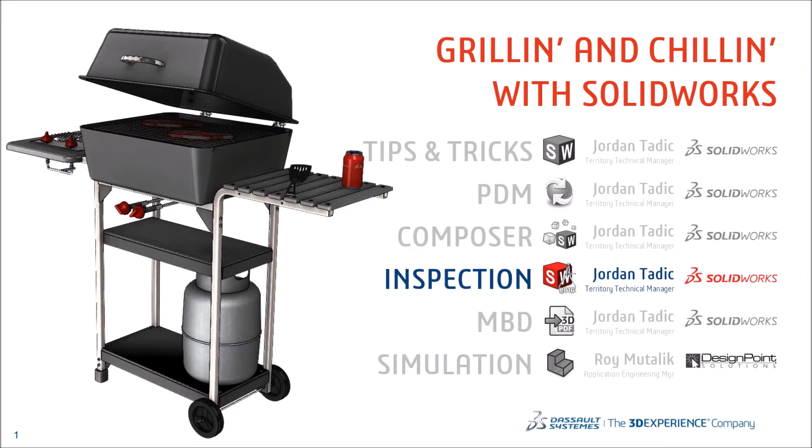So now the topic at hand is SOLIDWORKS Inspection. As I mentioned earlier, anyone with a quality department or the need to create first article inspection reports and such, this product is just the easiest to learn because the training is almost no time at all, and immediately within seconds you'll be able to start publishing out first article inspection reports with zero accuracy issues. So let's take a look at how it works.

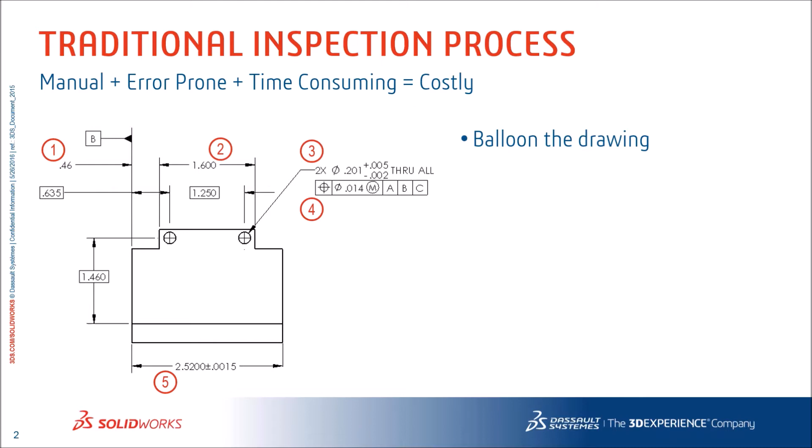First off, let's understand the traditional inspection process. So engineers or detailers are creating drawings, and those drawings might be available on the quality department screen digitally like a PDF, or in a lot of cases they are printing these out and creating balloons with a pen and maybe a little stencil for each one of the critical dimensions that need to be inspected.

Now, that takes some time, but the idea is they want to populate a first article inspection report. So they'll transpose those balloons maybe in a software like Microsoft Excel to capture all of the important information for inspecting these parts that are actually being produced out on the shop floor. So they'll go ahead and record the nominal values and then calculate the upper and lower limits and apply those to the specific columns in a spreadsheet.

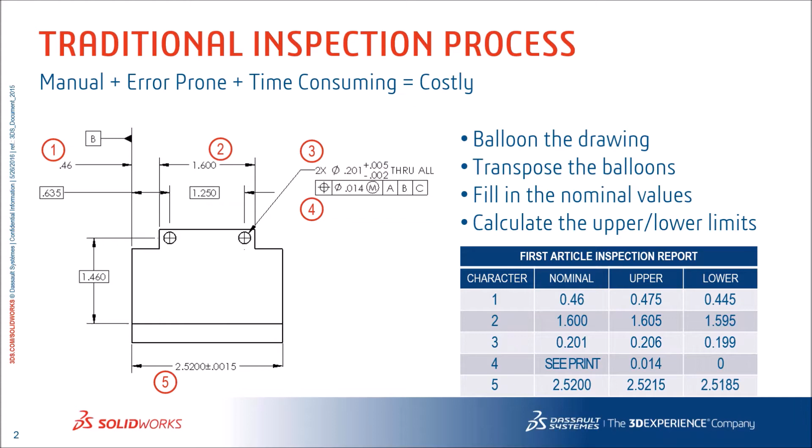So this process currently is very manual, and because it is, it's error prone and it's time consuming as well. And if you consider the fact that that was just one drawing view and this has to be repeated for every drawing view across maybe even a multi-sheet drawing, again, that could take quite a while.

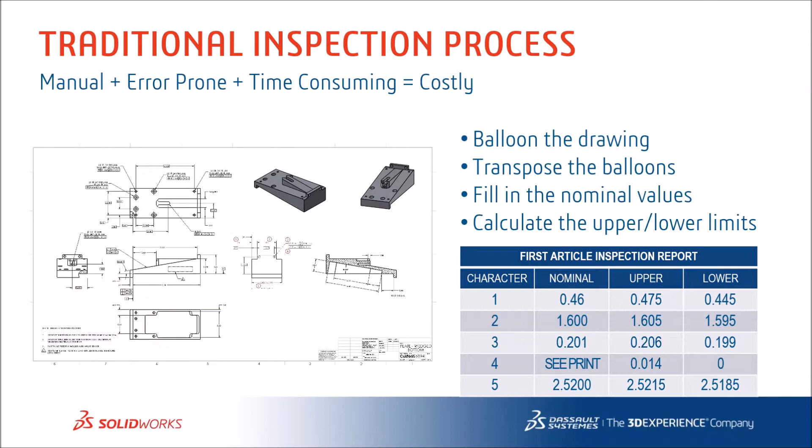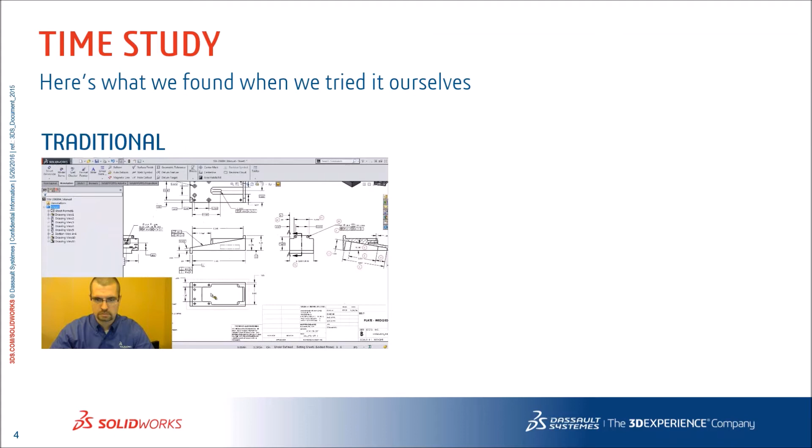To figure out how long it actually took, we put it to the test ourselves. This is Steve, my colleague, and he volunteered for the task of detailing and ballooning an entire SolidWorks drawing. Then he went ahead and captured each one of the critical parameters into a Microsoft Excel spreadsheet. All right, so typing these in, calculating out the upper and lower limits, and hopefully not making a mistake in the process. It took him about 55 minutes. And you talk to our customers, or you go and talk to your quality department, and you'll quickly find that this is an accurate time estimate of this process.

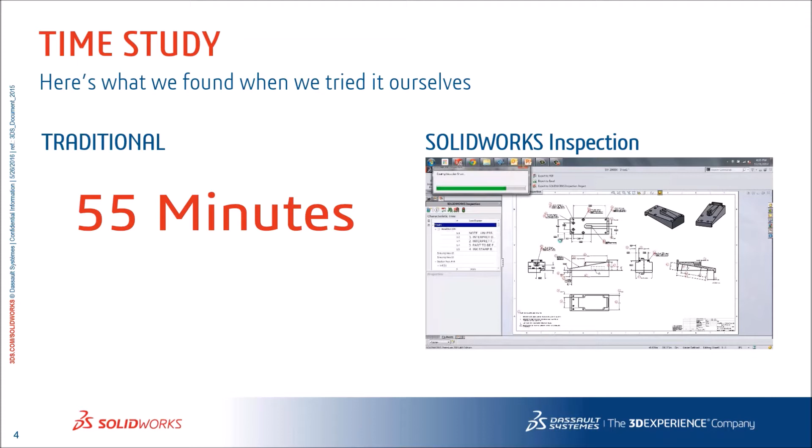Now, don't blink, because in SOLIDWORKS Inspection, this entire process, with 100% accuracy, can be accomplished in less than 30 seconds. So this video on the right is not being sped up at all. Just one click of the button, SolidWorks can go ahead and balloon an entire drawing, and then one more click of a button, SolidWorks can then transpose all that information properly formatted into an Excel spreadsheet. And again, that takes 30 seconds or less.

Not only are you speeding up that process, but you are also eliminating room for error because all the data is being translated digitally from one digital source to another digital source and not being typed in manually by a human.

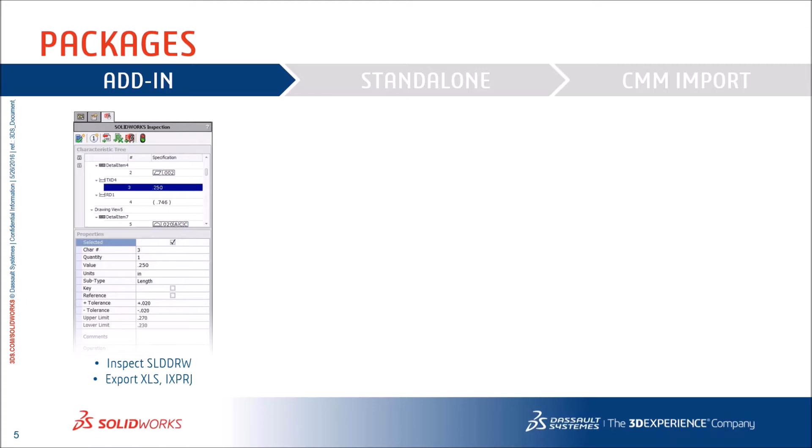So when we're taking a look at SOLIDWORKS Inspection, it's actually offered in a few different packages. Number one, and I'll be demonstrating each one of these individually, is the add-in. So SolidWorks is capable of doing all your CAD tool operations and so forth, but as you purchase products that integrate directly inside of a single window interface, you can activate and deactivate add-ins, and Inspection is one of those. And what you can do, like you saw in that 30-second video, is quickly create an inspection report from scratch from a SolidWorks drawing right inside of SolidWorks.

But not everyone has SolidWorks installed, especially those that this software is most useful for, which is people in the quality department. So what we also make available is a standalone version of the software. This is a very lightweight application that doesn't require the hardware specifications that a CAD software would require. And it's a lightweight application, so a very quick install that can be installed pretty much on any computer.

So here, a quality associate or employee can then open up a PDF or a TIFF file, balloon it themselves using OCR, optical character recognition, or they could open up a drawing inspection project originating from a SolidWorks drawing, and open that up directly into the standalone software so that they can then add the level of detail that they need. You know, additional properties, inspection processes, and so forth, so that the engineer and the SolidWorks license doesn't have to be consumed for that type of work.

And then the third portion of the software is importing measurements, whether it be from a CMM machine, you know, importing an entire text file or CSV file of all the coordinate measurements directly into Inspection, or just using a set of digital calipers that are connected to your computer via USB cable, and taking those measurements and having them register into the document.

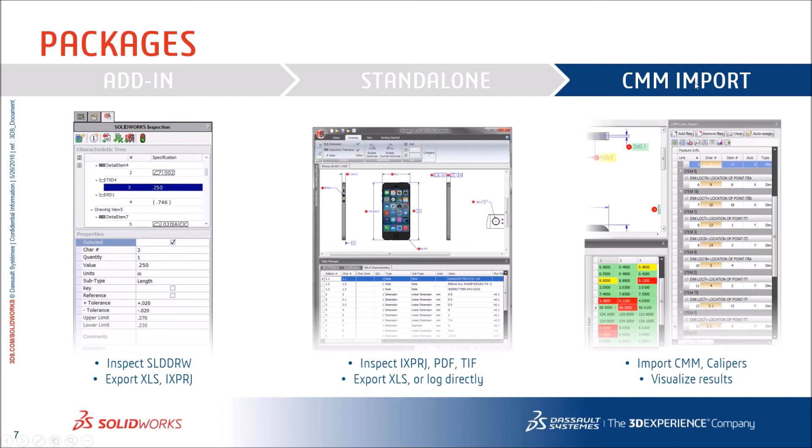Now, these three functionalities are wrapped up in two separate packages. There's a standard package, very inexpensive. Actually, the professional package is inexpensive as well, but I'd say anyone with a quality department or creating inspection reports that's a SolidWorks user, this is low-hanging fruit, a very inexpensive investment, an immediate return on investment with all the time that you're saving for little cost. So the standard is something that everyone should be looking at.

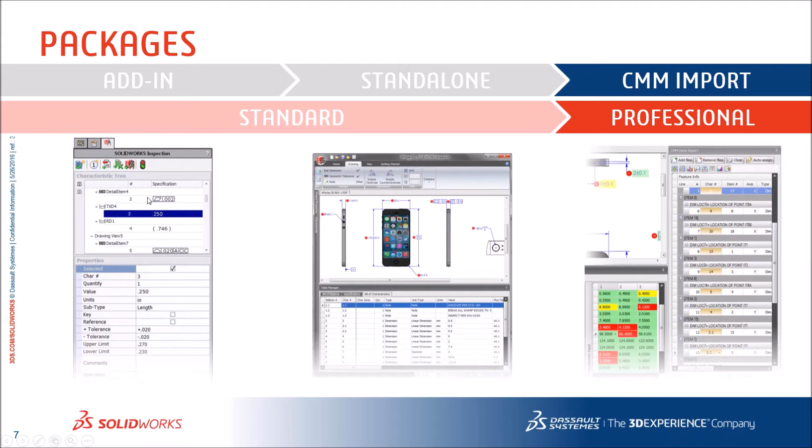But if you have digital measurement machines like a CMM or a USB set of calipers, then you should also consider the professional package, which will allow you to take those measurements and import them directly into the inspection standalone software. Now again, with the standard package, you get both the add-in, a single window user interface in SolidWorks, and the standalone package that the quality department can use. They just can't be used concurrently if you purchase one license. So if you need to use them at the same time, you can purchase multiple licenses.

All right, so let's take a look at what the add-in interface looks like. I'm going to open up one of the components, in this case this valve mixer component, and then open up the drawing from that component, and on my SOLIDWORKS Inspection tab, fire up a new project. This project on the left-hand side of the screen controls all kinds of default things. You could set this up once and forget it, or you could create multiple templates to choose default settings from.

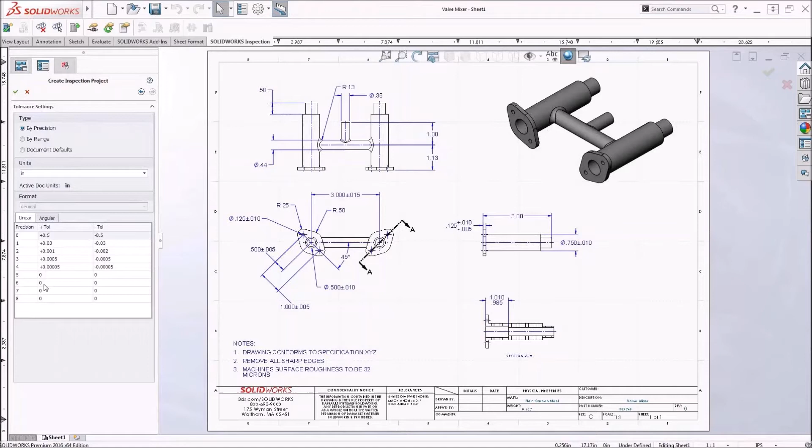And you could see that we could filter down the dimensions that actually get ballooned to maybe dimensions only marked for inspection, so it doesn't balloon all of them at all times. But in this case, I'm just choosing to balloon every single dimension in the drawing. Now immediately, on the left-hand side of the screen, you see an entire list of characteristics. These are the characteristics of the data inside of the drawing that need to be accounted for in the inspection.

So we can move the automated locations of each of the balloons around, tidy it up a little bit. But as I click on any dimension, I can adjust its inspection properties. In this case, these two dimensions don't need to be inspected. I'll just delete them from the inspection report, and it will re-balloon the entire drawing so that everything is sequential, without skipping any numbers. I could also add details like what inspection method is going to be used for each individual characteristic.

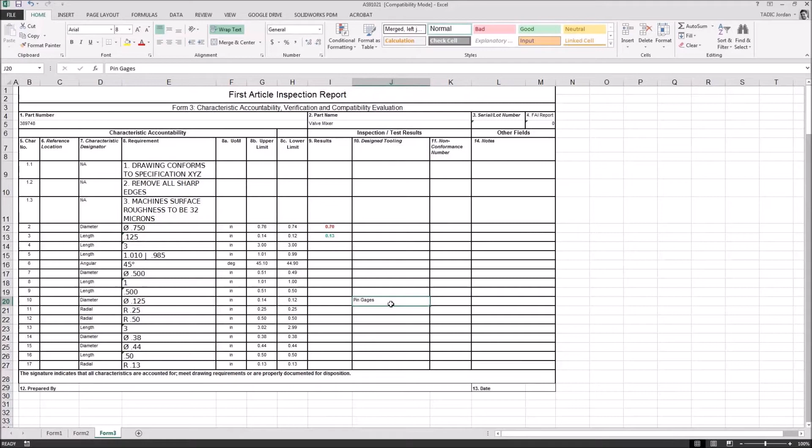And then with just a click of the button, I can export an inspection report. This report can follow the standard formatting that you currently use today for your first article inspection reports. And we can incorporate Excel functionality like conditional formatting to highlight dimensions if they're in or out of spec. And again, that report can meet your formatting. So the way the columns are laid out and all that, we can adapt SOLIDWORKS Inspection to it very quickly.

Now what I've just done is, rather than just going straight to the Excel document, I've also exported an inspection project. By exporting an inspection project, rather than putting all of the inspection formatting, details and properties on the designer or someone with a SolidWorks license, we can pass this off to the standalone software so that someone in the inspection department can do so with no CAD modeling experience whatsoever.

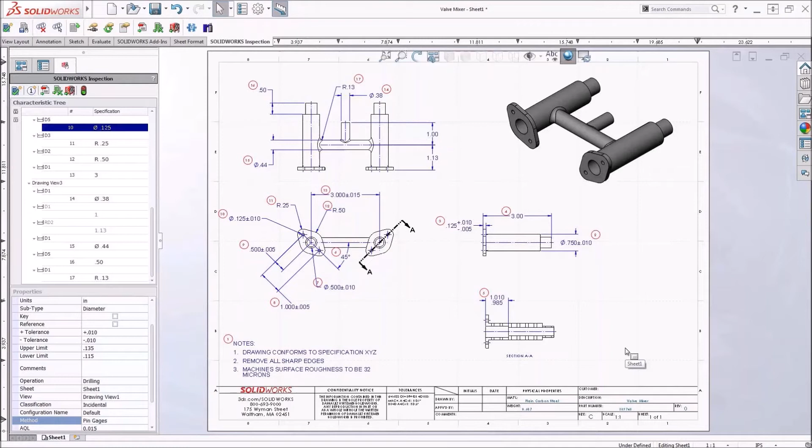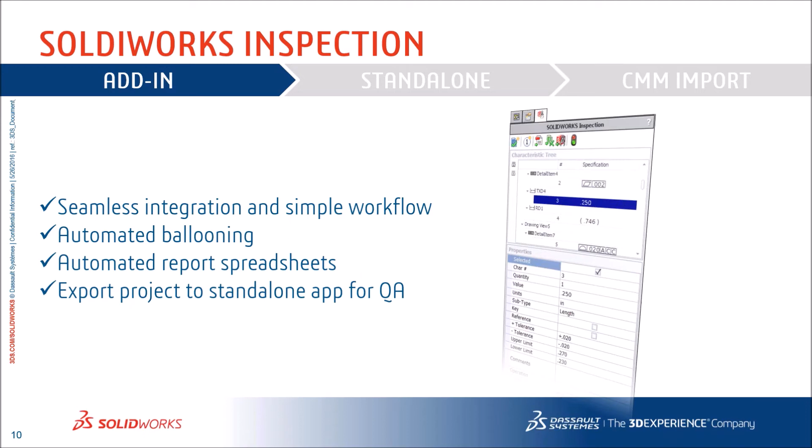So again, the add-in is seamless integration, a single window interface inside of SolidWorks, automated ballooning, automated reporting spreadsheets, and the ability to export an inspection project for the quality department so that they can take it from there. And that's what we're going to take a look at now.

Now I'm going to step back in this next demonstration and pretend that from scratch I'm opening up a PDF or a TIFF file. And then to speed it up, I'll open up the project that we previously exported from the SolidWorks add-in component of the software. So first I'm going to start a brand new inspection project. And again, this is using the standalone software that does not require CAD workstation hardware specifications.

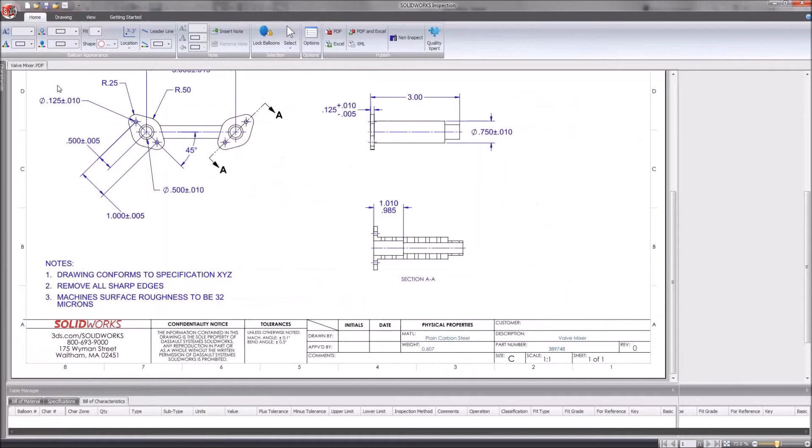So if this was a PDF or a TIFF file, pretty much just an image, I can use optical character recognition. You see me drawing windows around the part name and the part number for that text to automatically be read and registered into the appropriate location. Here I'm starting to capture notes, and you'll see that it will recognize each one of these window selections and all the text inside of it.

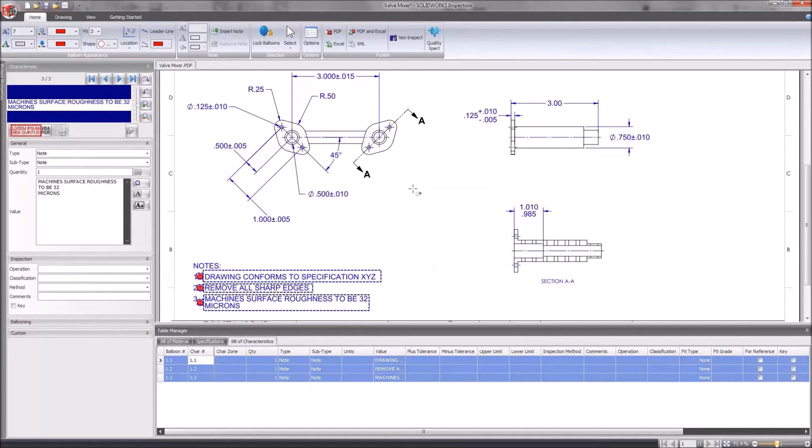And down below is our bill of characteristics. It immediately adds a balloon to each one, 1, 2, and 3 in this case. But because all these notes are related, I'm actually combining them into a single balloon, grouping them into 1.1, 1.2, and 1.3.

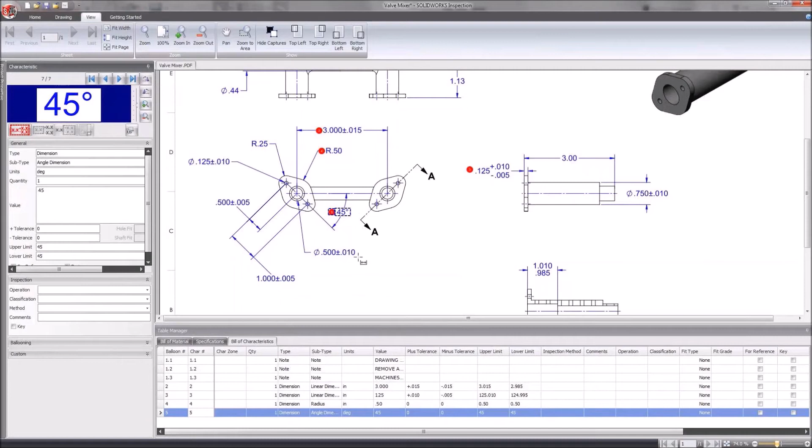So we have an ability to organize each one of these characteristics in our bill of characteristics as we wish. Now I'm going to continue window selecting dimensions, and you'll notice with every variation of tolerancing scheme, it puts the appropriate data from the optical character recognition into the appropriate field stored inside of the database or inside of the inspection project. It will recognize the degree symbol and know that the type of dimension is a degree. It will notice the different types of tolerances, and a radius and so forth will be recognized as a radius dimension as well.

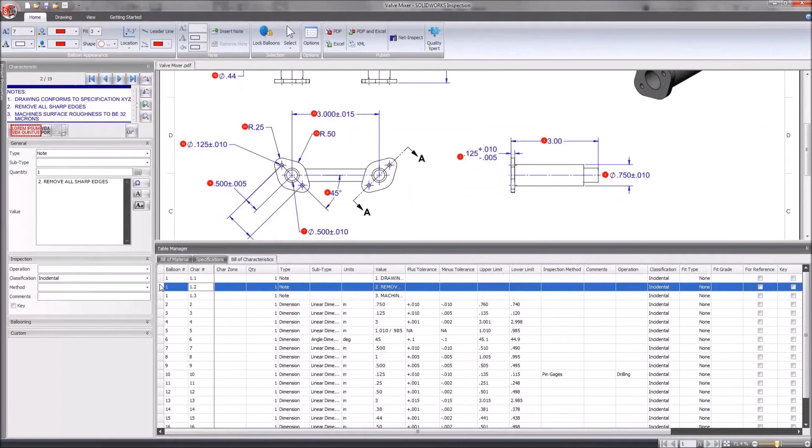Here I've just imported the SOLIDWORKS Inspection project. So now what we've done is jumped ahead in time so I don't have to window select each one of these dimensions myself. They were read digitally from the SolidWorks drawing directly. And now what I'm doing is I'm just adding some additional information. I'm window selecting some of the different inspection characteristics and assigning an inspection method.

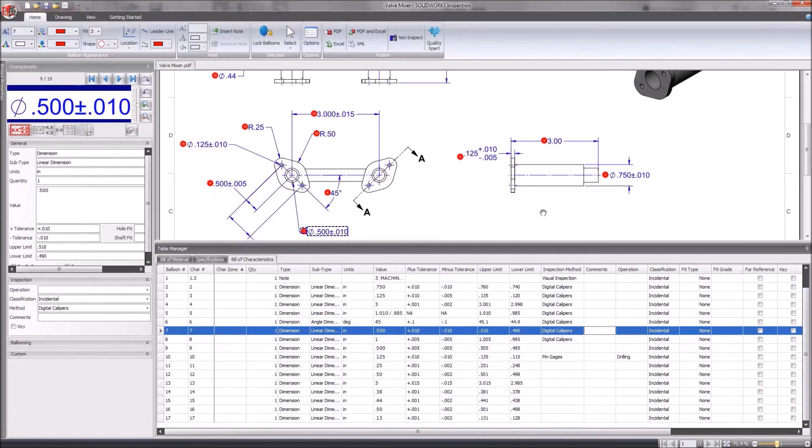So here, this would allow me to sort by the inspection methods or filter to a specific inspection method. Say if we've got our digital calipers hooked up and we're ready to do that, we can filter to all the inspection characteristics that require digital calipers and record them in sequential order. And now once I've done that, I can just export it just like I did before to Microsoft Excel and have my first article inspection report matching the format that I need, ready to input my measurements.

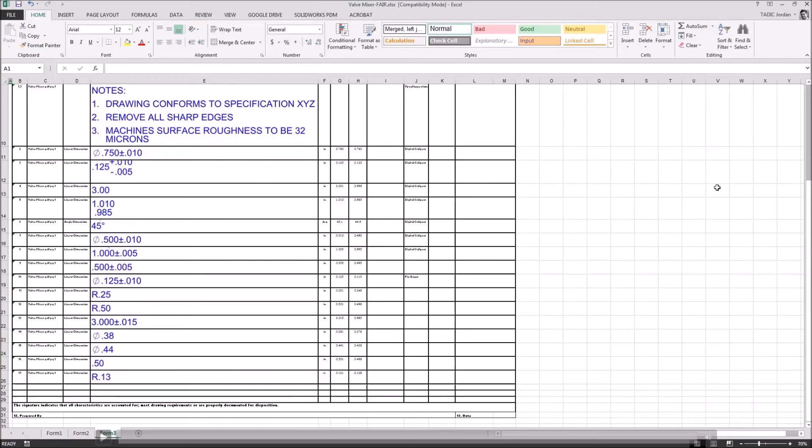So the standalone software gives us flexibility, right? It's included with every version of Inspection, whether it be standard or professional, to give you the flexibility to integrate your quality department, someone that doesn't have the CAD software installed, into the inspection, reporting, and documentation process.

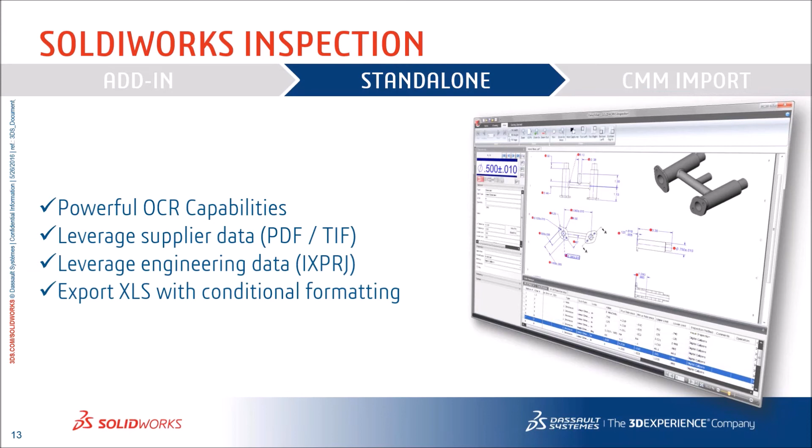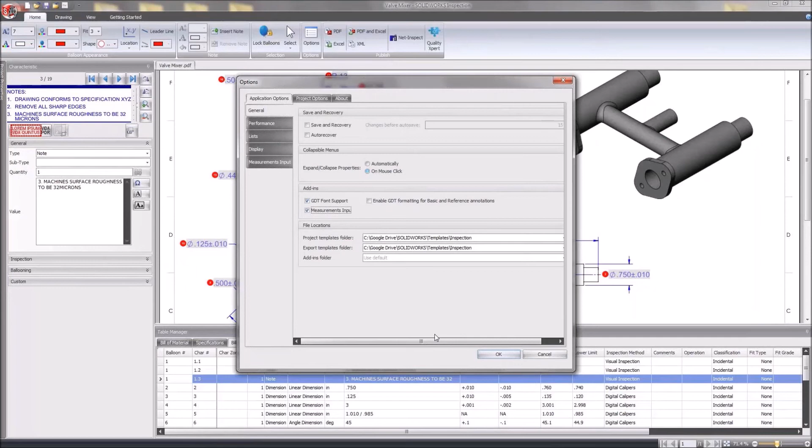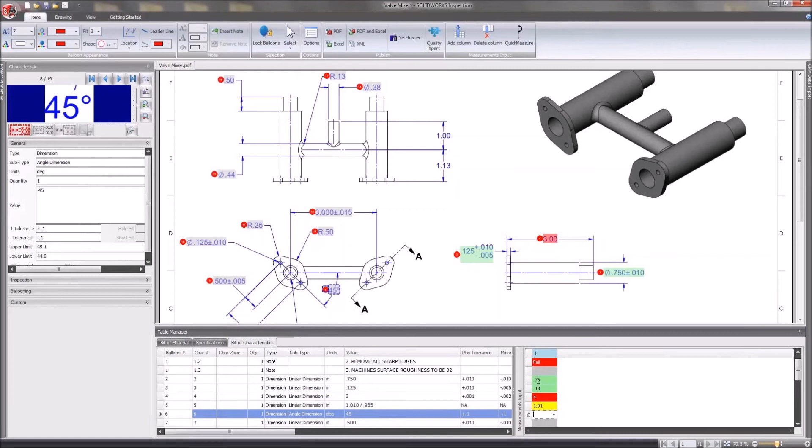Now the final phase of this presentation that I wanted to demonstrate is the measurement capabilities, right? So when we have the standalone software of Inspection open, I can activate, if I have the professional version of SOLIDWORKS Inspection, the measurement capabilities. And what this will do is open up a pane on the right-hand side of the software. And from there, I can type in pass or fail into my visually inspected characteristics or the numerical values that I'm entering as I'm taking measurements with other tools.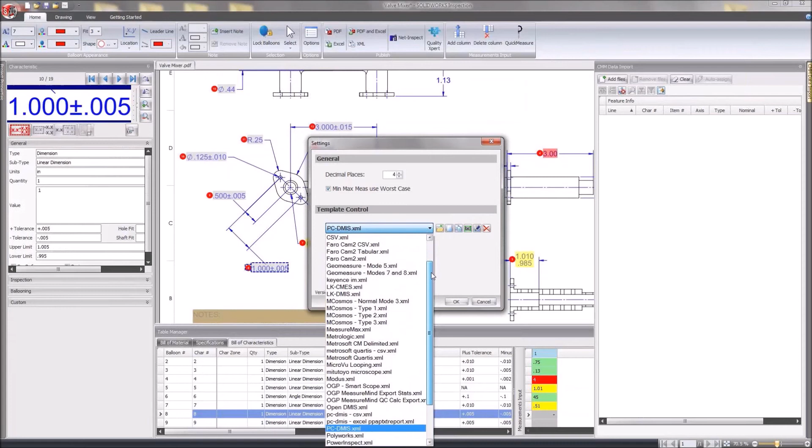And you could see that the dimensions on the screen highlight, so it again becomes very obvious where we are observing issues with our tolerancing and our manufacturing, and we could start to recognize trends. Now the other thing that we could do is import data directly from CMM machines, and you could see the entire list of CMM machines that come with translators right out of the package so that the data is being properly translated into the appropriate fields. But if one of those weren't on that list, then we can quickly create a template to translate it appropriately, and that template can be reused for future inspection reports as well.

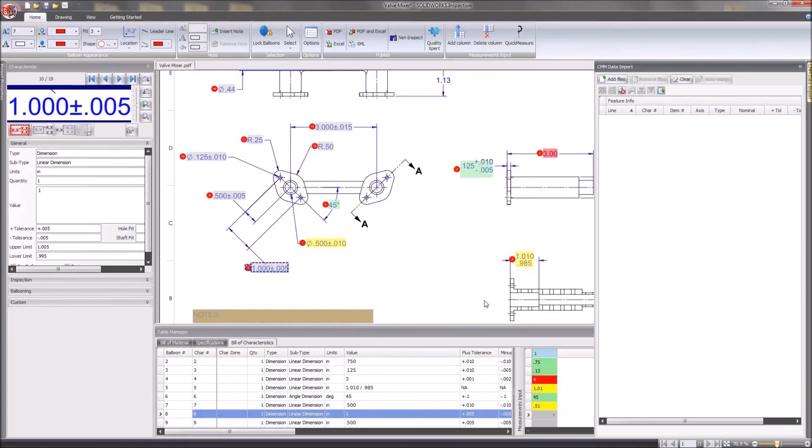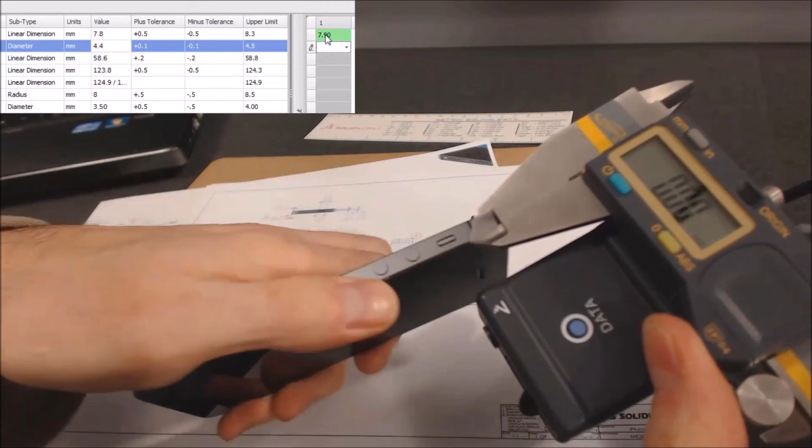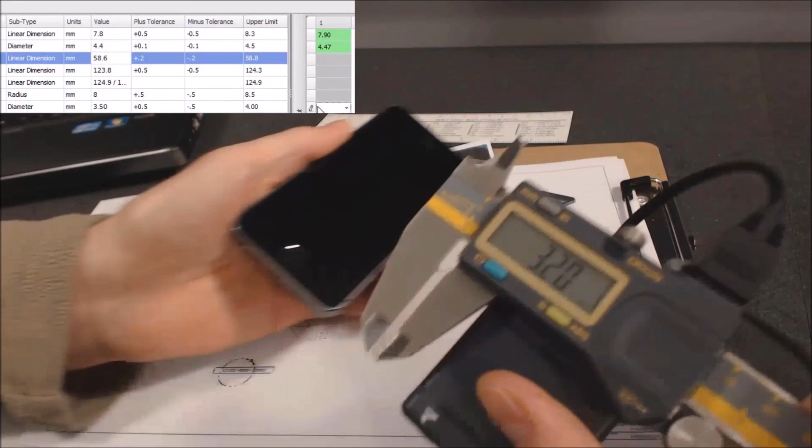Here's a quick little video of an inspection project, and you can see superimposed in the top corner the inspection software actually registering the measurement that I'm taking with my USB digital calipers every time I click the data button on my digital calipers. So it's going into the appropriate location as I'm making my measurements.

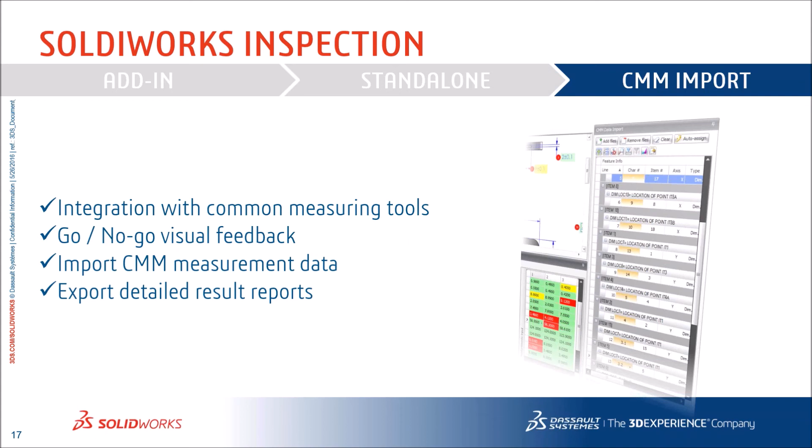So the CMM import portion of this product allows us to completely integrate common measuring tools, again like CMMs, digital measuring devices, and so forth. And then import CMM data as well, so that it's just a click of a button: you measure up the entire part on the CMM machine, import that measurement data, and it appropriately links all that data with the dimensions on the screen, and you could see with the cross-highlighting which areas of your model are experiencing issues.

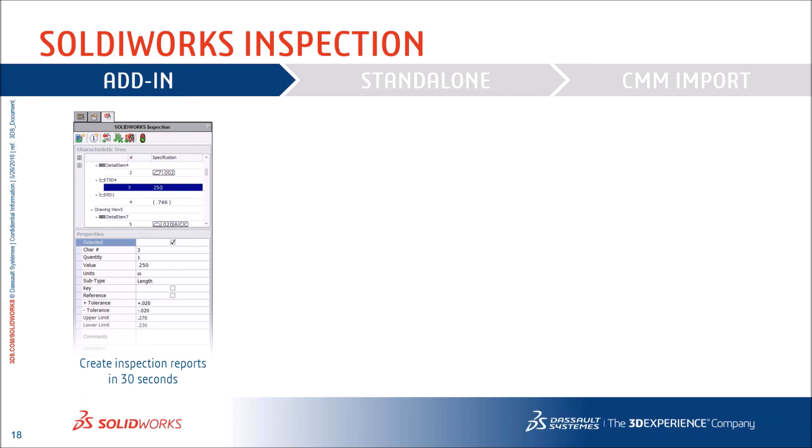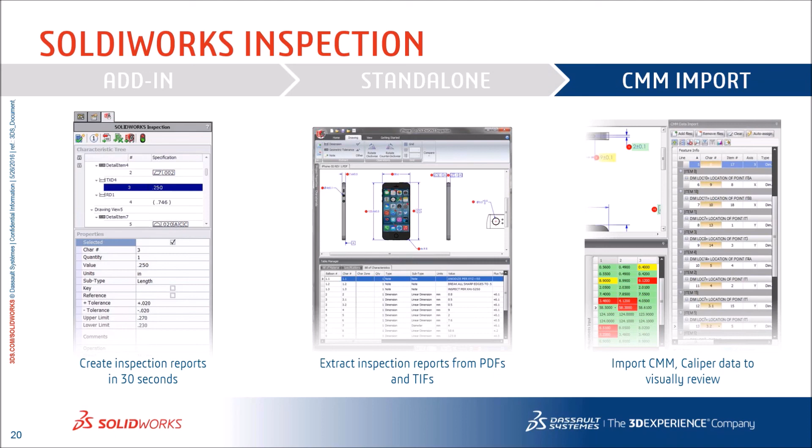So again, to wrap up what we just covered, the add-in allows you to create an inspection report in less than 30 seconds, just a couple of buttons, one to apply the balloons, one to export the spreadsheet in whatever format you desire. The standalone software can incorporate those from your quality department to access a lightweight software to add all of their inspection data to the project. And then the CMM import, available only in the SolidWorks Inspection Professional package, allows you to take advantage of digital measurement devices while circumventing the manual inputting process of someone keying in the actual measured values and potentially making a mistake.

So we're about 10 minutes away from our next presentation, but in between, I'd like to throw up a few customer quotations. Again, this product allows you to pretty much in the same day that you purchase it, get your return on investment. The product is very inexpensive, and immediately it can make all of your inspection reporting a fully automatic and digital process, so there is no room for human error, which can greatly speed up and improve the quality of the quality department, as ironic as that sounds.